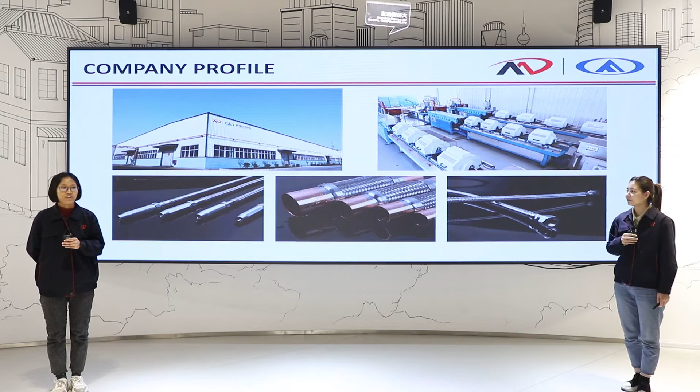The power of this company's development is so exciting, right? Yes, of course. Okay, now let's look at the products. We have fire flexible hoses, anti-vibration hoses, gas hoses, and other types of metal hoses. Now we focus on the fire flexible hoses.

Fire flexible hoses, just as the name implies, are the flexible hoses used in fire protection systems. The fire flexible hose connection method may be unfamiliar to some customers. It's a new kind of connection method used to connect the sprinkler head to the main pipe in the sprinkler system, and it replaces the traditional hard pipe, consisting of a stainless steel hose and a mounting bracket.

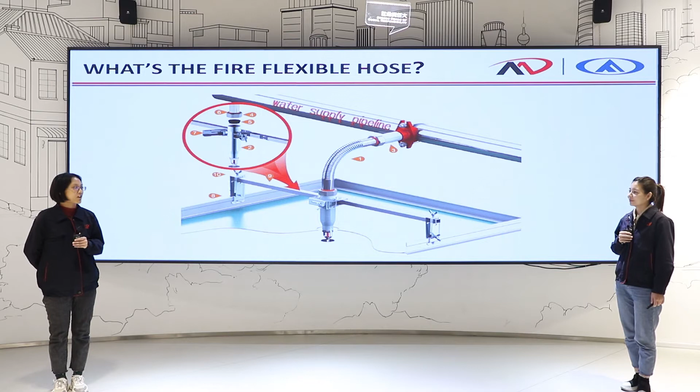I will show you two installation pictures to help you understand better about the fire flexible hoses. It's a new solution for installation of automatic sprinkler systems. So what advantages does it have compared with the traditional hard pipe connection?

The first is the improvement of installation speed. The professional requirements are not so high, and the assembly worker is free to bend the fire flexible hose to avoid obstacles and adapt to emergencies on site. Ordinary workers can start work after simple training, so the installation speed can get a big improvement.

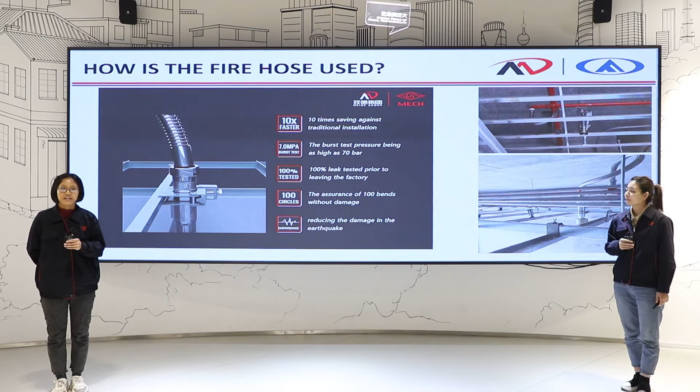Now let's look at some data. The fire flexible hose installation takes about 10 minutes; one worker can finish 48 sets per day. The hard pipe connection takes about 25 minutes, about 20 installations can be finished, and 3 workers are required, with an average of 6 per worker. So the overall installation speed increased by 8 times.

This is a qualitative leap for the automatic sprinkler system. Yes, and the sprinkler head connected by the fire flexible hose could be adjusted after installation. With the use of fire flexible hose, the sprinkler head, ceilings, and other auxiliary jobs could be done at the same time.

So the construction period and the installation speed could be improved by more than 60%, especially now in the epidemic time when construction workers are seriously insufficient. So the use of the fire flexible hose could greatly improve the installation speed and shorten the construction period.

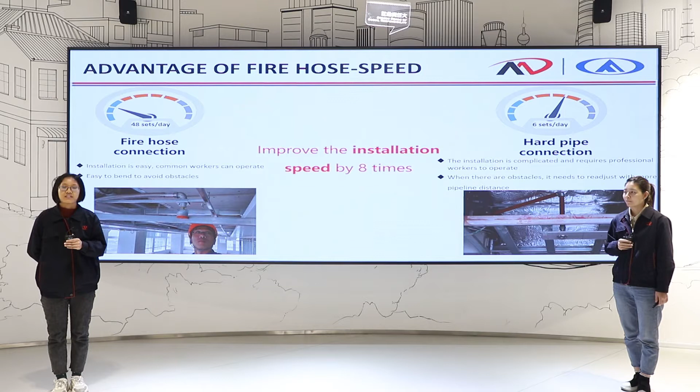According to the statistics, the use of fire flexible hose could improve the construction period and also save more than 40% of the cost. In addition to the cost saving, the safety of the fire flexible hoses is not matched by the traditional hard pipe connection. With the fire flexible hoses, you just need to connect the sprinkler and main pipe online, but the traditional hard pipe connection needs to combine several malleable iron fittings with steel pipe fittings.

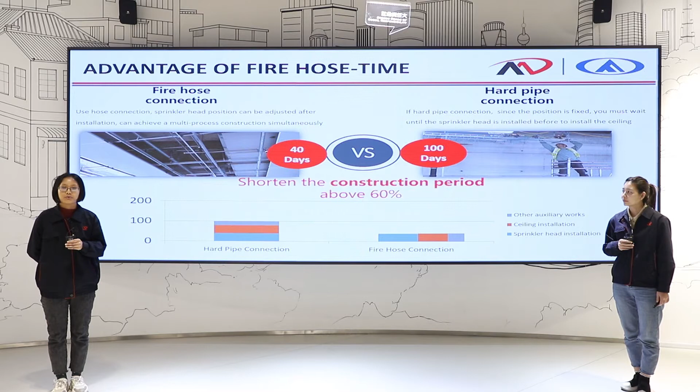One threaded connection point means one more risk of water leakage. We do 100% leak testing before leaving the factory. Our fire flexible hoses have no leakage risk point, so the security factor has a big improvement.

Yes, exactly. And Vita, have you ever been in a construction site? No, never. Actually, I have experience at a construction site.

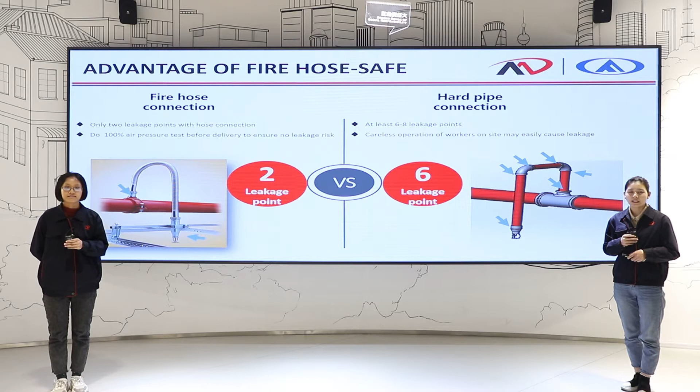We all know that on site we need to use electrical tools for pipe cutting and threading. It's known that a construction site is complete chaos. I just have a photo to show you. How about your feeling? I think this is so messy. Yes, and also the use of electrical tools on the construction site may bring some potential safety hazards.

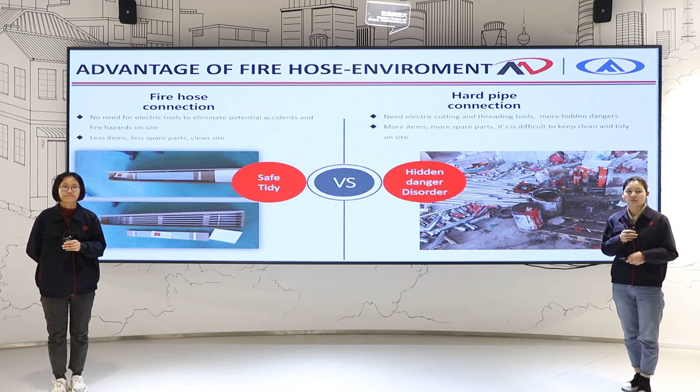So if the fire flexible hose is used, these problems will not occur. We only need to send one box of flexible hose, including hose body, brackets, and accessories. We need to open the box plus one wrench to solve all the problems, and the construction site can be kept clean and orderly.

As you said, the advantages of the fire flexible hoses compared with the traditional hard pipe are so obvious. Although the price of the fire flexible hoses is much higher than the hard pipe, the cost of installation and the security risk are decreased.

Yes, exactly. Okay, now we will show you other series of the fire flexible hoses. There are two series of the Mech brand fire flexible hoses: braided and unbraided. First, to introduce the FU series, without the outer stainless steel braiding.

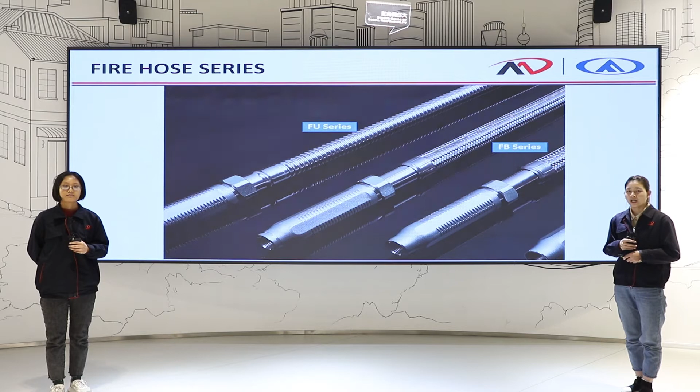The corrugated pipe of the FU series is of high strength. It can withstand more than 200 psi, even without the protection of the braid. And it has obtained UL and CUL certificates. There are 5 lengths for choice: 28-inch, 40-inch, 48-inch, 60-inch, and 72-inch.

The product is highly cost-effective as there is no outside braiding part, so the cost is reduced.

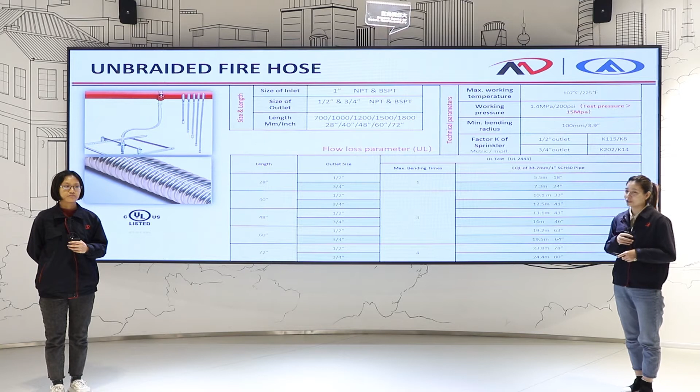Another one is the FB series, which has stainless steel braiding. The corrugated pipe of this product is protected by a layer of braiding, so the inner corrugated pipe is very soft. The product is supposed to pass a bending test of 50,000 times. Soft means the fire flexible hose can bend freely, making it easier for workers to install. We also have 5 lengths for your choice: 28-inch, 40-inch, 48-inch, 60-inch, and 72-inch.

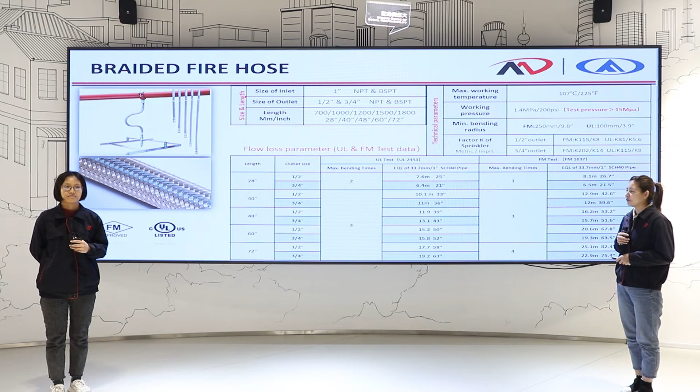All items have passed the FM and UL certificates. Yes, in addition to these 2 series, we also provide several kinds of joint parts. There are 3 types of outlet types, and if the construction site is narrow, the long elbow could be chosen for the sprinkler connection to avoid obstacles.

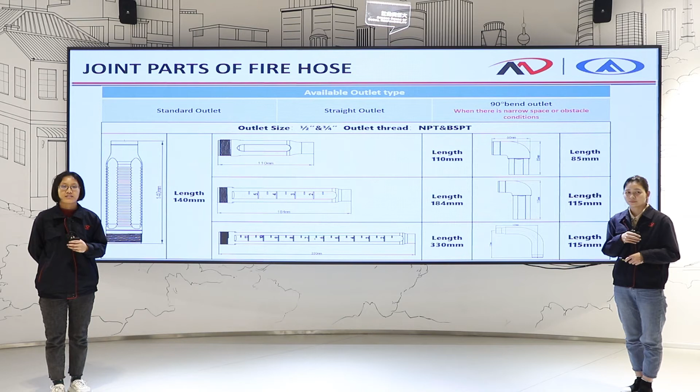Okay, after introducing our star products, the fire flexible hoses, now let's present another product, the anti-vibration hoses. It is widely used in the domestic market, and there will be widespread use in the overseas market as well.

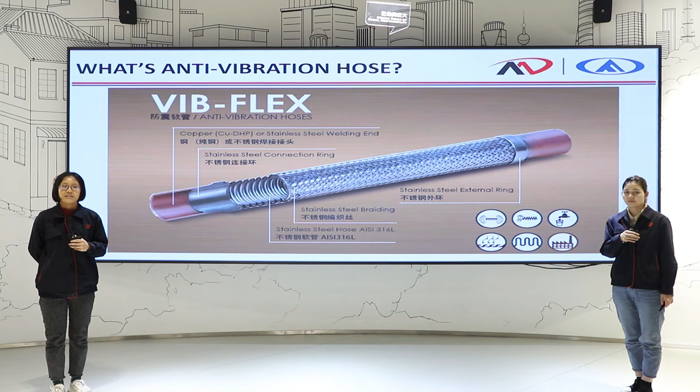The anti-vibration hoses are made of 316L corrugated pipe, high strength braiding, and copper or brazing ends. They are designed for good performance in mechanical systems by absorbing vibration and related damage, and to prevent noise occurring in mechanical piping and various applications.

Yes, the vibration existing in mechanical systems may cause many serious problems for the users, such as material fatigue and noise. So we developed the anti-vibration hoses. They can effectively reduce vibration and noise transmission, and can be widely used in refrigeration systems, air conditioners, pressure systems, pumps, engines, and other fields.

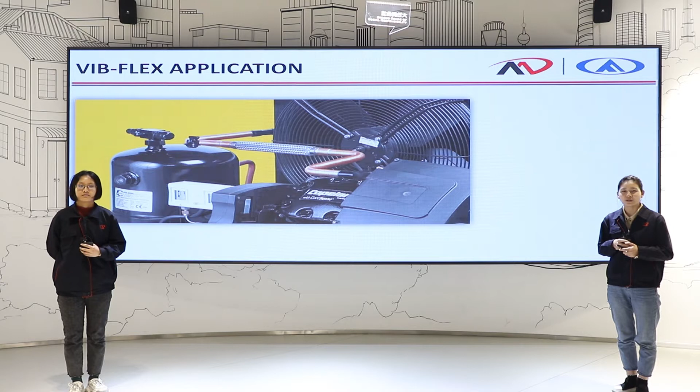Also, our company can provide all kinds of OEM service in different fields, such as gas, sanitary ware, high-speed trains, steam boilers, petrochemicals, and so on.

Okay, Vita, have you ever wondered how such a great product is made? Yes, I think many audience friends have the same question as me. So we invited our colleague Wallace to take us to the production workshop site to have a look. Okay, now let's turn it over to Wallace.

Thank you, my colleagues. Hi, my friends, I'm Wallace. I'm in the warehouse of our factory. I'm going to introduce to you the whole process of how flexible hoses are made. For flexible hoses, the main materials are stainless steel belts and wires. We do 100% inspection before stocking them, checking the thickness, weight, and nickel content of these stainless steel belts.

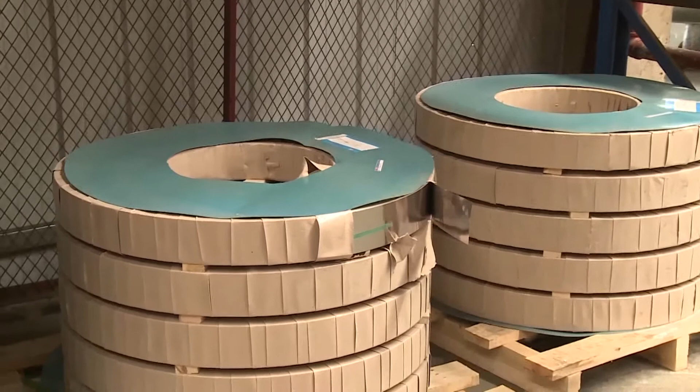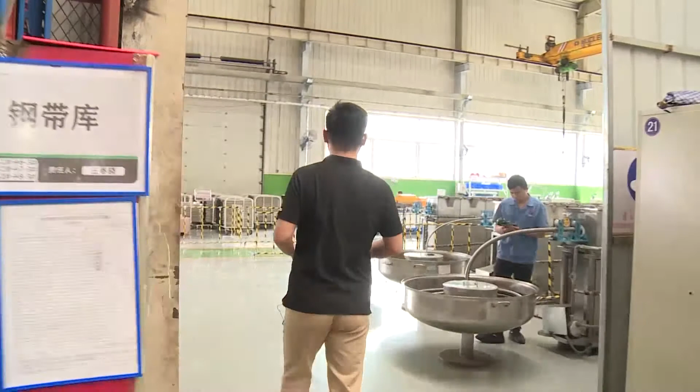So we're going to go to our workshop. You can see our workshop is clean and tidy. We have 3 parts: this is the hose making line, that is the assembly line, and we have another part far away for the packaging line.

We have 3 machines for hose making. All these machines are imported from Europe, which might be the most advanced equipment in China. Hose making includes 4 steps: welding, cooling, forming, and washing. So let's get started with welding.

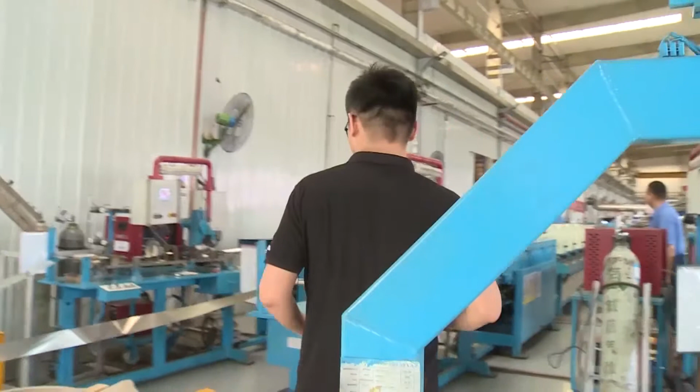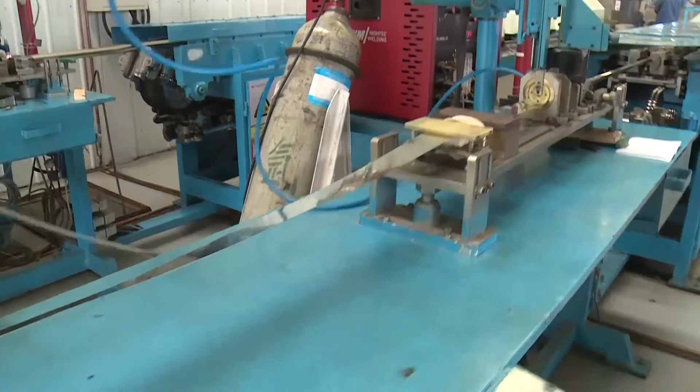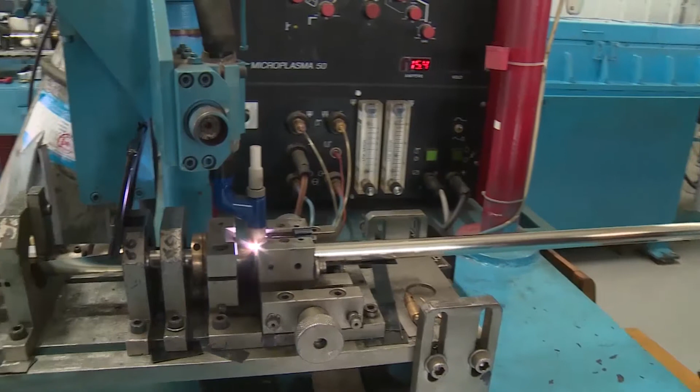This is the first step, welding. After this step, this stainless steel belt is made into the hoses. We adopt the most advanced micro-beam plasma welding machine from Germany. This machine ensures a beautiful and firm seam.

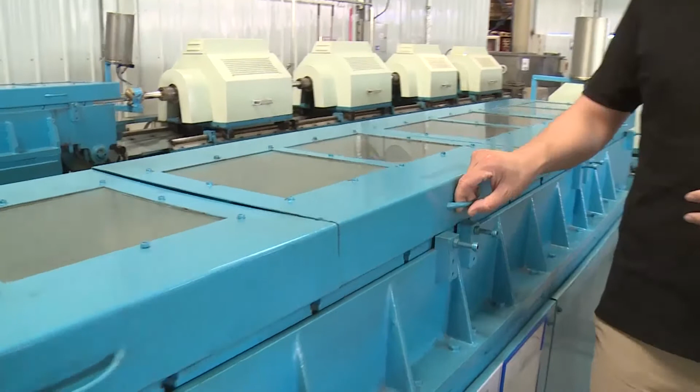Okay, next step is pulling. You can see the clamps of the tractor are round, just to ensure we cause no damage during this process to the roundness of the hoses.

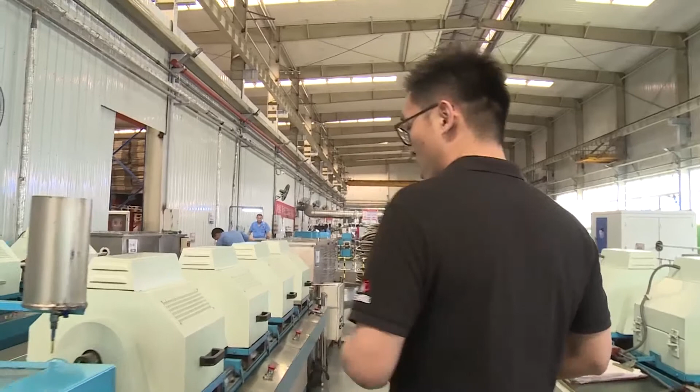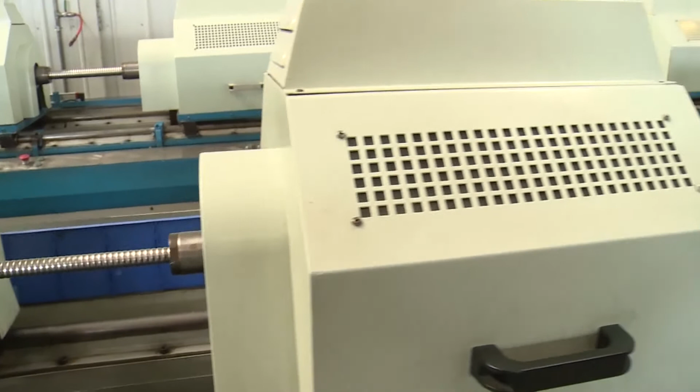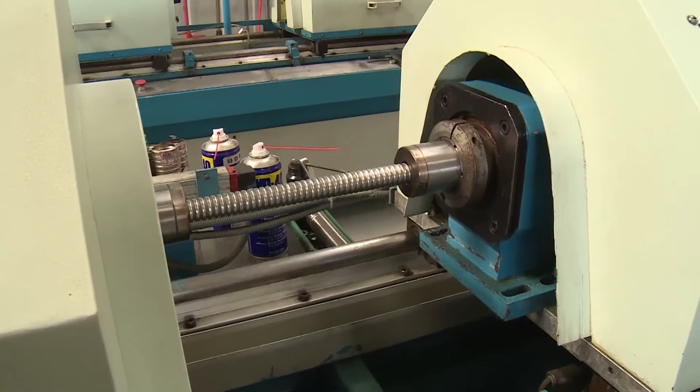This part is the most important part of hose making, forming. You can see the corrugation is not made during one time. It's made by 4 steps. After each step, the corrugation gets more and more dense, which is really important because only this way can make the hoses flexible.

The last step of hose making is washing. We wash the flexible hoses with high pressure water until the temperature may reach more than 80 degrees.

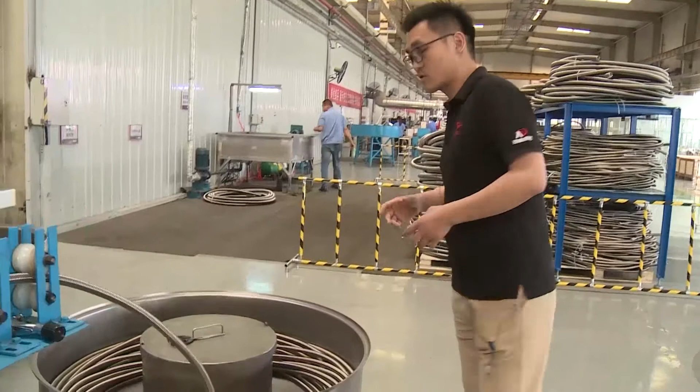After the hose making, we have a quality control point. We're gonna test every inch of the flexible hoses. Let's ask my colleagues, how do we test the flexible hoses?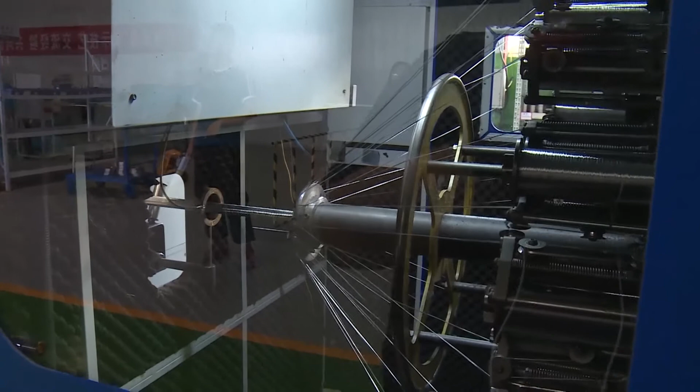This is our mesh machine. This machine is also imported from Europe. It can assure the uniformity of the neat mesh with high tensile strength. This is how it works.

Okay, we're gonna go into our assembly line. It has 4 steps during the assembly line. The first step is cut.

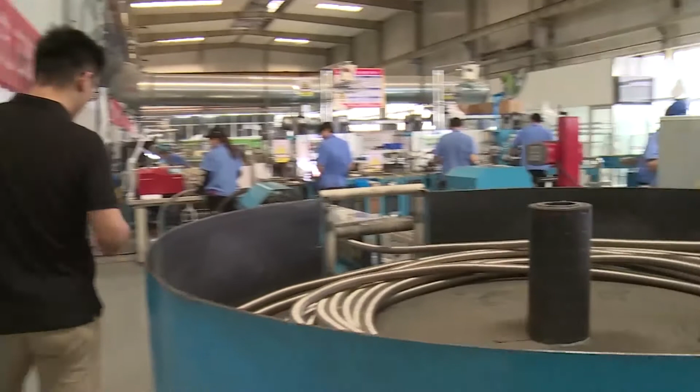We adopt an automatic cutting machine. This machine can assure we cut the hoses uniformly and have a very flat cutting end.

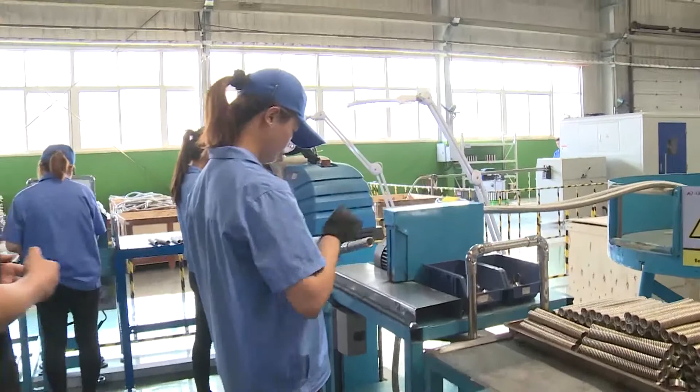Next step, we need to cover the hoses with the mesh.

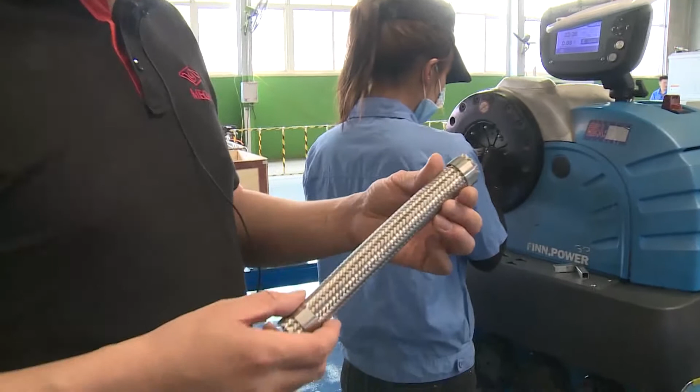After we cover this, we need to connect them together. Connect the mesh with the hoses. We use this machine to connect them together.

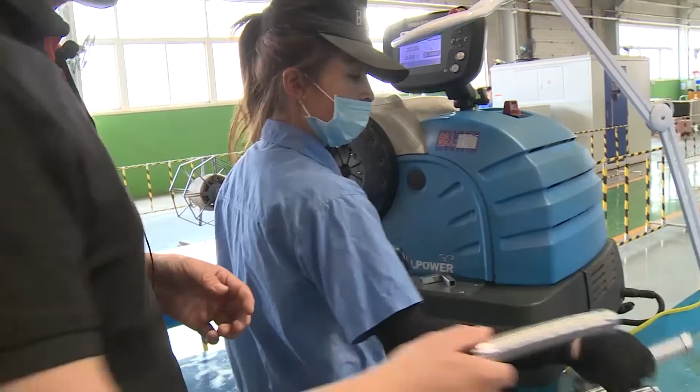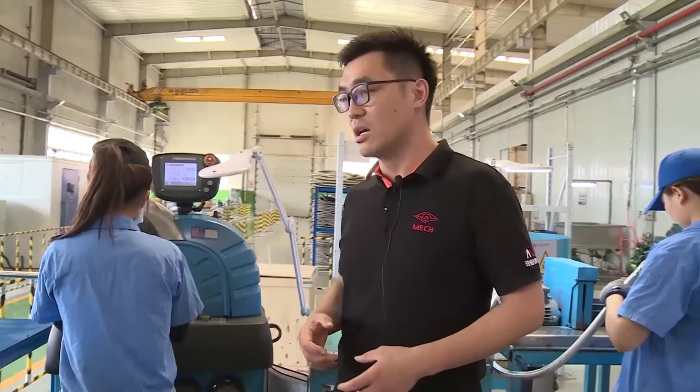It is applicable to a wide range of sizes. We just need to change the clamps.

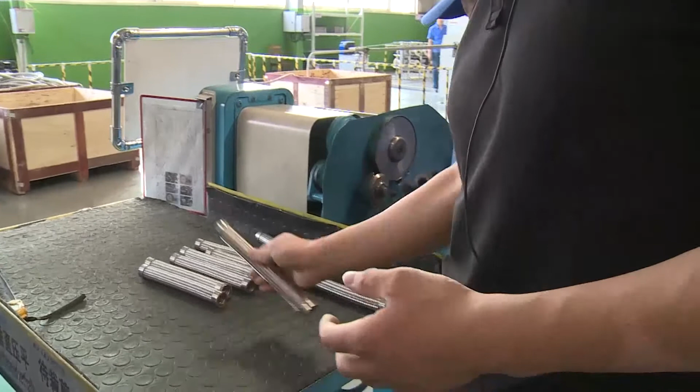After they're connected, we need to deburr. After deburring, you can see this end is quite flat.

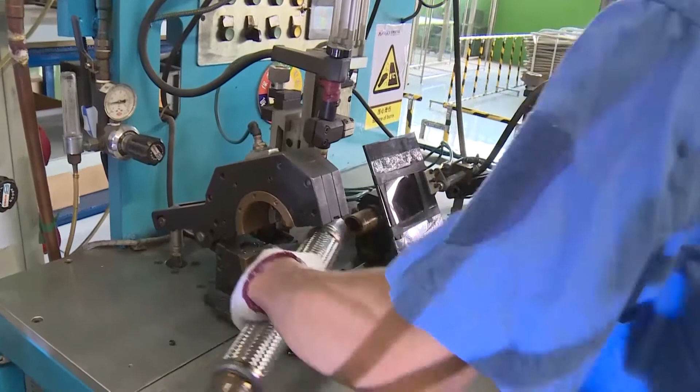Okay, another important step of assembly is welding. We adopt a very advanced welding machine.

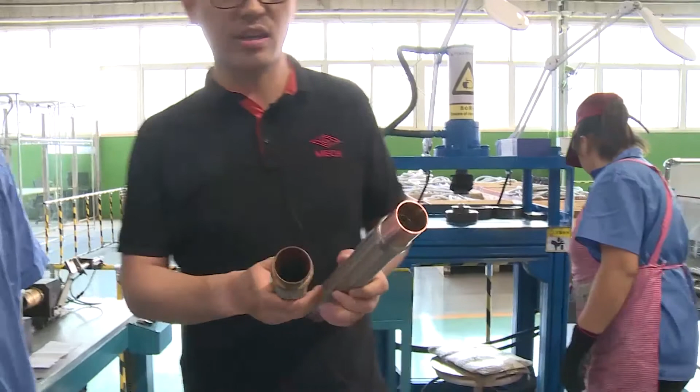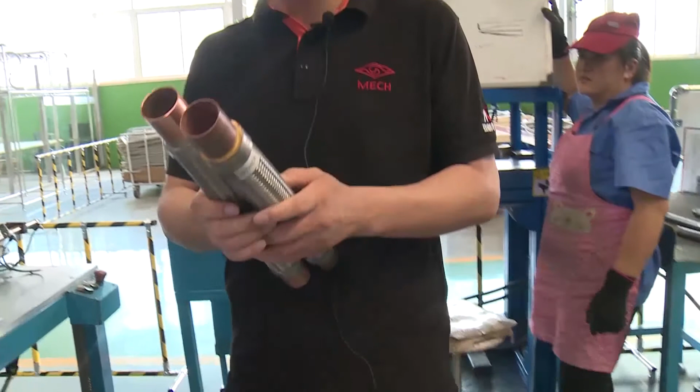You can see the difference between our products and the others' products. From this point, from the welding machine, you can see the difference is quite obvious. So let me ask our colleagues, what's the difference between this product and this product?

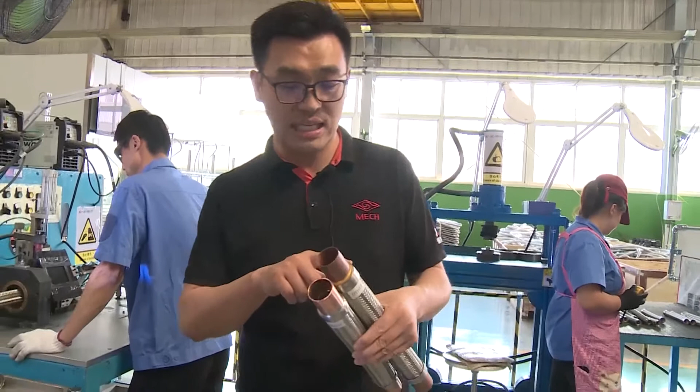So this technology is quite different. This one is welded by lead welding, but our products are welded with TIG welding. You can see the difference is obvious.

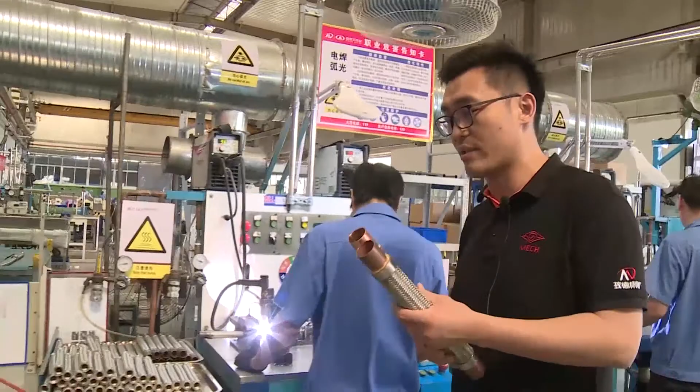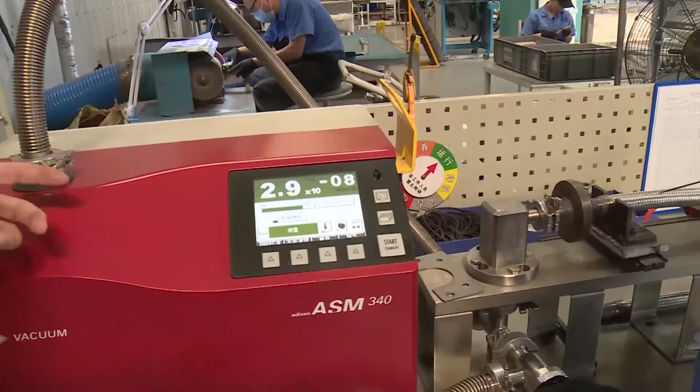So we have another quality control point during our assembly line. We have a tightness test. We test the leakage with the helium detector.

If the flexible hoses leak, this machine will give us an alarm. Okay, we're gonna go to the packaging line.

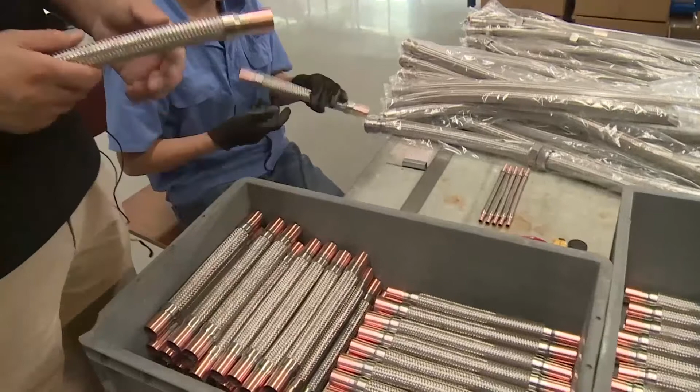After all these was made, we're gonna have the final quality control point. Our colleagues need to inspect the length of the flexible hose and the appearance of the flexible hose to make sure every product from our factory doesn't have the leakage problem.

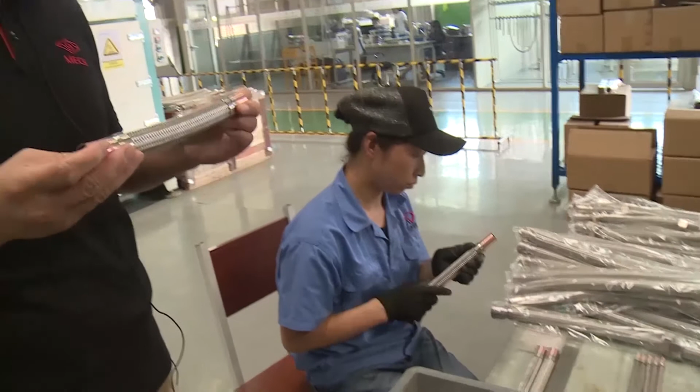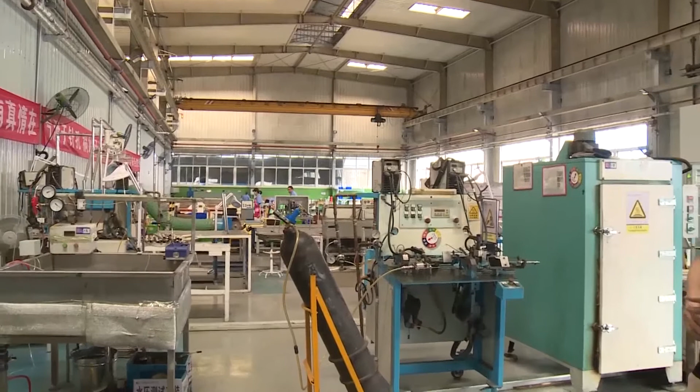This product is used in mechanical equipment. Also, we have assembly lines and packaging lines over there. We have a very advanced laser marking machine. We're not going there, but I'm gonna show you how they make our products beautiful.

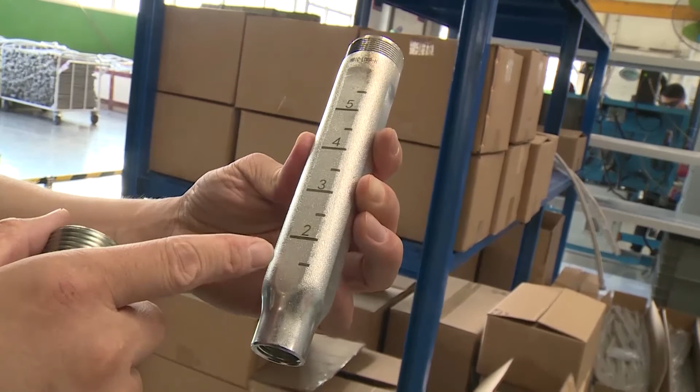You can see these numbers are marked by the laser marking machine. Very beautiful. And this one shows the direction of the flow.

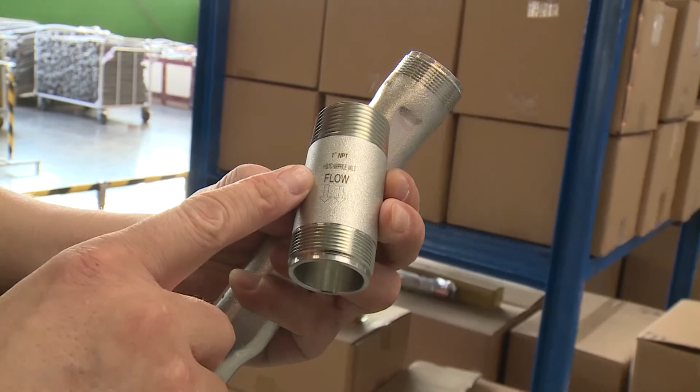That is the whole process of the production. Welcome to our factory in the future. I'm gonna give the time to my colleagues in the R&D center. Thank you very much. Bye bye.